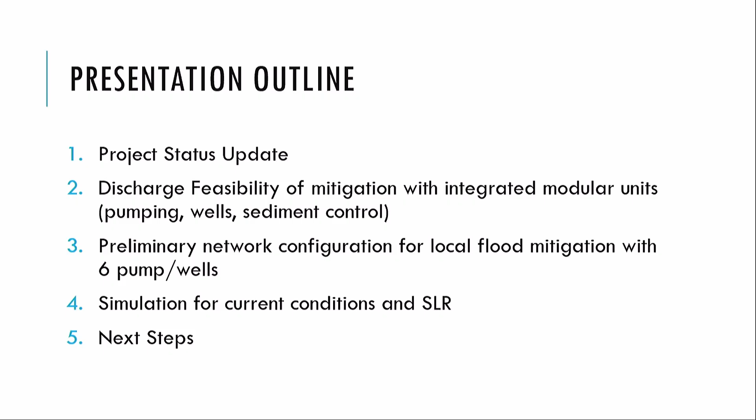I will go through the presentation. In the first 8 to 9 slides, we have the entire concept developed, and after these slides we have more details which we can discuss. In the very beginning, I will provide the information that we have summarized.

After the initial review of the data and after developing the model, we had a hesitation whether we're going to inject fully all the amount in the ground or partially. Our previous presentations referred to partial injection in the ground and partial discharge through the outfalls. After reviewing the data and after the permitting agencies meetings, we're considering a full injection in the ground.

We have determined that we'll need 6 pumps for 6 locations, and because of backup purposes, we're also going to use 6 duplex pumps, which means each location will have 2 pumps - one for backup and one for flow. These can be configured for peak conditions.

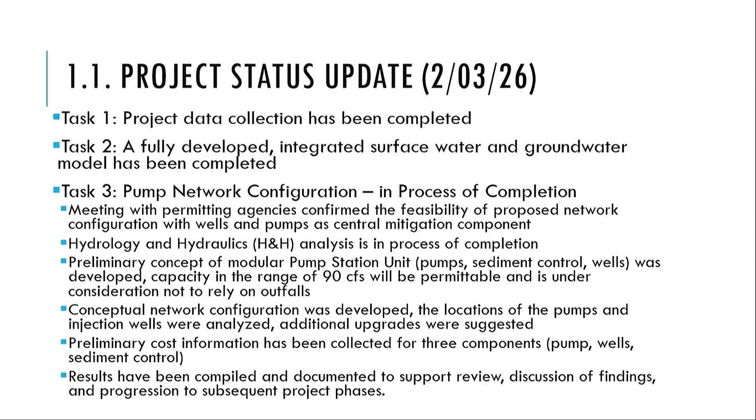Go ahead, so with this I will continue to the next. The project timeline, we're today on February. Excuse me, are you happy with the answer? Yes, well, I'll get back to it. Okay, I'm pretty happy.

It's fine. By the way, we're planning a separate meeting with Fernando, where we'll go deep into the details, because he has expertise in civil engineering, so it will definitely be very helpful.

On February 3rd, we have completed the first three tasks. We're still refining some of the pump network design, we're actually very much completed with it. We're looking in the background through the phasing, and based on the discussion today and any questions we need to provide, we may make some additional adjustments so that this process, together with the entire team, with Mike and with the village team, is a joint effort for all of us.

I wanted also to mention something that's very important conceptually, which will also partially answer your question. Conceptually, if we look at...

I think I have a problem with this, but I had a problem before. I cannot turn it on. Oh, okay, thank you, Mike.

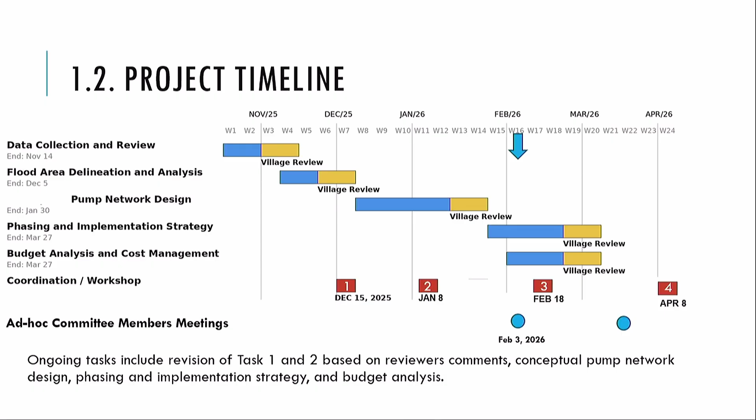So what is the alternative? We're talking about the alternative, and when we talk about it, we had the basis, which was the previous stormwater plan. The previous plan was to drain the excess water and discharge it to the outfalls.

I also wanted to mention the natural hydrologic cycle, because we want to talk about the environmental aspect of our proposal. In the natural hydrologic cycle, you have precipitation, and if there were no urban areas, no imperviousness, this would discharge into the ground and infiltrate. By adding imperviousness, which is typical for urban areas, we are developing excess runoff that has nowhere to go.

And the result is flooding. It's complicated to drain urban areas because when you have everything on top of the surface, you don't have easy access to the outfalls. So that is the base alternative: it takes all the flooded water and discharges it to a pump station. That's not unusual; it's done in many areas.

For our case, what we want to do, and what we are doing, is collect the excess water through the surface network, and this is then injected into the ground. That resembles the natural hydrologic cycle, so we're not disrupting it. We're mimicking the natural hydrological cycle to the maximum extent. This has lots of other aspects.

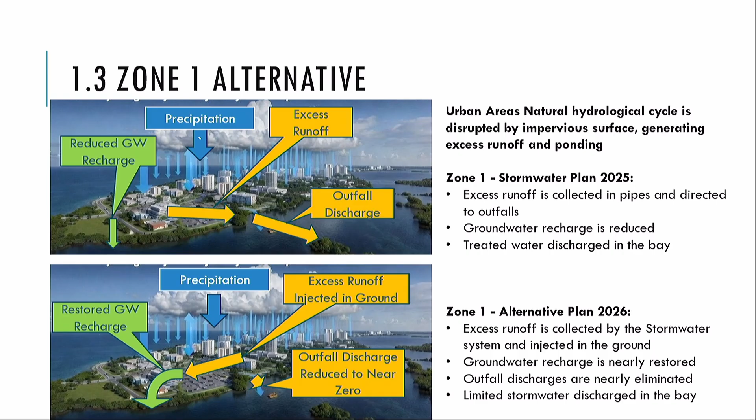So that's conceptually what we are considering. One question we addressed is how do we compare, because we're relying on a model, a numerical representation of this physical system that involves lots of parameters and uncertainties. So it requires calibration. For example, when we have a model, we need to adjust the parameters so it represents the existing event to the maximum extent. Then we say this model is calibrated, and we can use it for forecasting.

That's the same approach that AECOM did, and that's the same approach that we take.

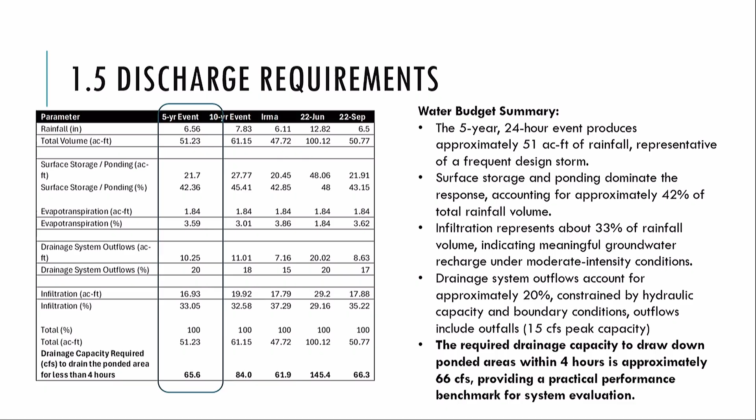Although the pump units themselves are not the most expensive - the most expensive are the additional concrete works, dewatering, excavations, and so on. But these two pumps, the reason we noticed - I'll show you later a figure that shows how the pumping is needed - so in general, we determined that we are relying on 65.6 CFS capacity for the 5-year event. That capacity means the pumps need to work for 4 hours. We need to have pumps working for 4 hours to remove the flooded water, which will comply with the level of service. So that is the objective.

I also wanted to address a question from the previous meeting - Mr. London asked what are the occurrences, or what is the frequency of the rainfall. So we extracted data from 2000 to 2026. We included 2026 too, even though it's just one month, because we had a flood event on the 22nd of January.

So you can see the frequency, and we're not making any statement about trends. You can see that between 2020 and 2024, there was the maximum amount of these events occurred. We're not making any statement that this is increasing with time. I consider this a stochastic process, a natural variability of the rainfall. It can increase, it can decrease, but we need to be prepared for the high point.

So it's definitely very important, and if we do nothing, as Mr. London said, what will happen? We had, for 10 years statistically, approximately 25 events. So we can say that are above 4 inches. What would be the average number of hours for an event?

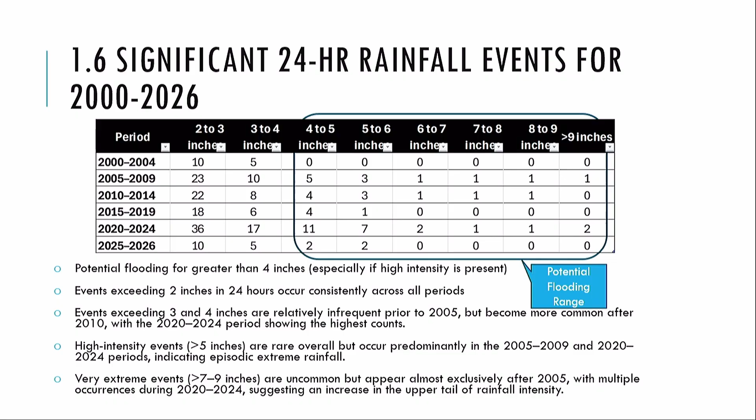But if we say what is between 6 and 7, these are the numbers that occur. Yeah, okay, but I'm not sure you're answering my question. I'm clear on this - are the ones to the right a subset? Because I'm reading 4 to 5, and there's 25 total. So am I to believe that there are only 25 of those events, 4 to 5 and above, and the ones above that are subsets? Or is this aggregate? No, this is not aggregate - this is only valid for this range, the number of events that is between 4 to 5.

In other words, 4 to 5, there were 5 events between 2005 and 2009. 5 to 6 inches, there were 3 events, correct? Yeah, and if we ask the question, what is above 4 inches? Then we'll say 5 plus 3 plus 1 plus 1 plus 1 plus 1, so this will give you 54 events.

Oh yeah, okay, 54, that's the total. I'm trying to... okay, yes, yes, yes, that's what I'm clear on, so they have to be thought of as subsets of it. Okay, yeah, so total 54 events.

If you don't mind going back to the previous slide - and you know I've asked this one before, so you should be ready for this - I want to be clear on how you got to 65.6.

We have 2 other reference points. One is the original 155, I believe it was, and then when we asked AECOM to do the 77, modified based on the change of level of service and design criteria, they came up with 77.

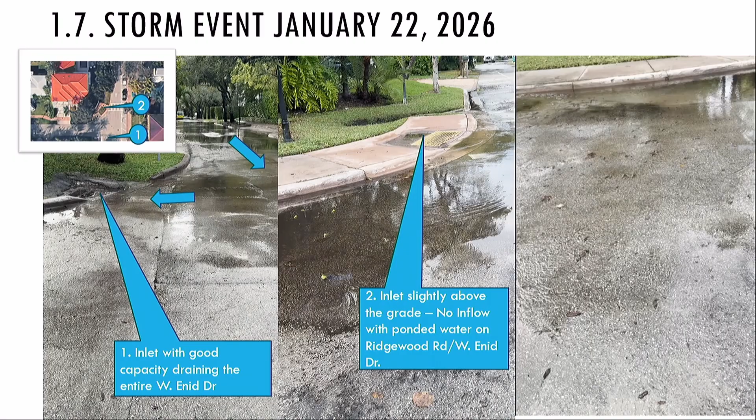And also, if you look at this one, for example, this inlet was above the grade. So if you look, this is ponding that was staying for a long time, so there is no access to the system.

George, I'm glad you went back to that slide. I know you put stars next to certain items. No, go ahead forward though, it's actually on the next slide. Here, you put stars on here for critical tasks, and I was wondering why add or lower catch basins and inlets to flood locations, approximately 120 locations, wouldn't be one of the first things we would tackle. It's the second task on track 3.

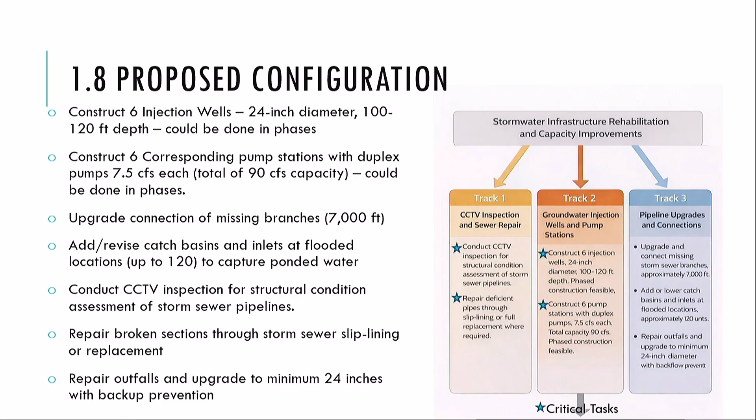Oh, second task, okay. And I know you have it as a task, but you don't have it starred. I would say that would be one of the first things we want to do. I think this will be based on the phasing too. We'll provide guidance on where this could be placed. We have approximate locations, but this needs to be reviewed, and I think this is based on phasing. If you prioritize this as highest priority, we will suggest some prioritization based on our understanding, but ultimately it's your decision.

Again, obviously the model would tell us otherwise if it's true or not, but if you just did that, it sounds like we get the water flowing better with the system we even have right now. Sure, it will improve by better positioning. Yeah.

That will definitely improve. Wouldn't we do that when we were resurfacing the roads in that area? No, this would be more work on the stormwater system. We could slope the roads, but this is more about that. It makes good sense, right? Probably not expensive to do either.

One of the reasons we can't say this would be a priority - I think the priority would be these first two - is because if you add these missing pipes, you're exposing this area to tidal conditions as well.

If you don't construct these wells to reconnect and inject into the ground, when you add these pipes, you're going to expose much more to tidal conditions. So during high tide, this will be difficult to drain - there's no place for the water to go. Even if we get more into the system, it may not do much. Makes sense, so that's the consideration, but we can look into the details.

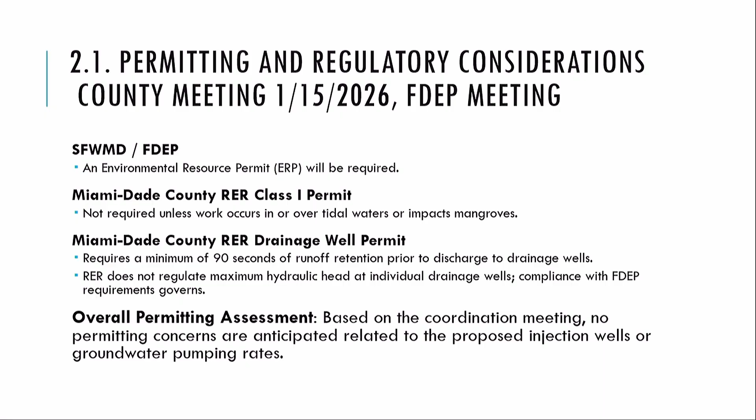So I have a question - how long would it take to get permits? It could vary, 60 days, 90 days on one hand, but on the other hand it really depends. The drainage well permits are typically really quick.

All the permits so we can start construction - well, we don't have a design to know what. Assuming you had the design, how long is it going to take to get permits? We're not holding you to it exactly, approximately - it could be 60 days, 90 days, 120 days. So let's say 120 days, conservative, that's reasonable.

Since you're involved with construction, a system like this - if we said okay, go ahead, we want to do this - how fast could it get done? Assuming the materials were available, the pumps were available, how long would it take to build it? I don't know if I want to commit to a number, just for the permitting.

No, forget the permit. Now we spend 60, 90 days, we got a permit, we break ground, we start, and how long are we talking between start and finish for all 6 modules, how much of the pipe? I don't think he's got a number - it's not going to mean anything. I mean, like 5 years, 10 years, 20 years? No, I mean 6 months, 1 year? What are you talking about? I would say it depends on the contractor. Typically these projects are within 1 year.

One year, okay, or that's from the bidding. If you were to build, one pump and one... let's not get too far - within a 2-year window between pump, but with permits and all the rest of the stuff, 2 years. If we said put the foot on the gas, we could probably get the project done in a 2-year window. Is that what you're saying? Is that a reasonable number? Yeah, 2 years would be great, reasonable.

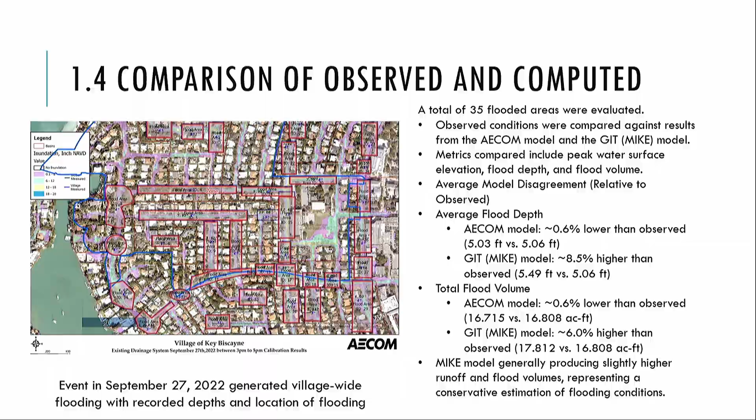On one of these pages I saw where we said observed conditions were compared against results from the AECOM model. Exactly what observations, and where did you get them? Going back to this image, the village, in September 2022, went and delineated the flooding that occurred on September 27, 2022, along with the depth. Okay, so that's my point - in 2022, none of our system was maintained, and it hadn't been maintained for 15 years.

So that observation is not really valid for you or for AECOM, because AECOM, I think, did the same thing. I think we need to observe now, where our Public Works Department has really jumped on it and is doing a really good job of keeping the system maintained, and seeing where the actual flooding actually is, right? No, absolutely agree. I think that's what we mentioned earlier, that we want to have understanding so we can do refinement of our analysis, because that's one of the points I was showing in this previous image - there is a location that really has good flow.

Yeah, so the other thing that I want to point out is that when we get involved with just talking about engineering and removing water and stuff like that, and how it's easy, and then we talk outfalls - I think it should be the goal of the Village of Key Biscayne, as a barrier island, to be a good steward of our Biscayne Bay, and eventually, one by one, eliminate every single one of those outfalls, and not send any water out into the Biscayne Bay, and send it all underground.

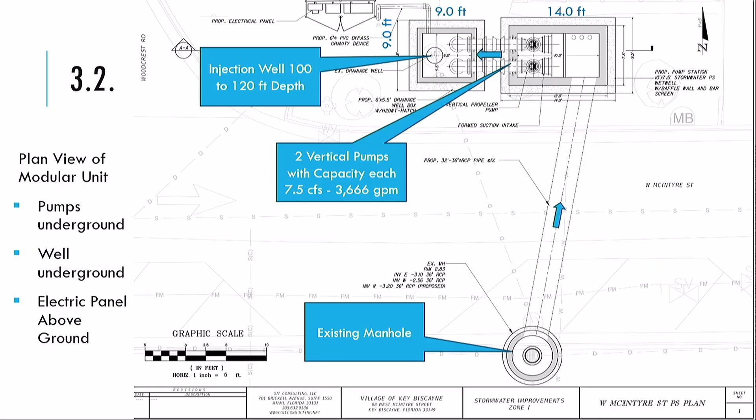We're considering we can convert it, but it's not necessary because basically we need to create a new well with casing, and it's appropriate. This is an example of how it would look underground, which probably won't be visible for anybody to notice - it will just look like a manhole.

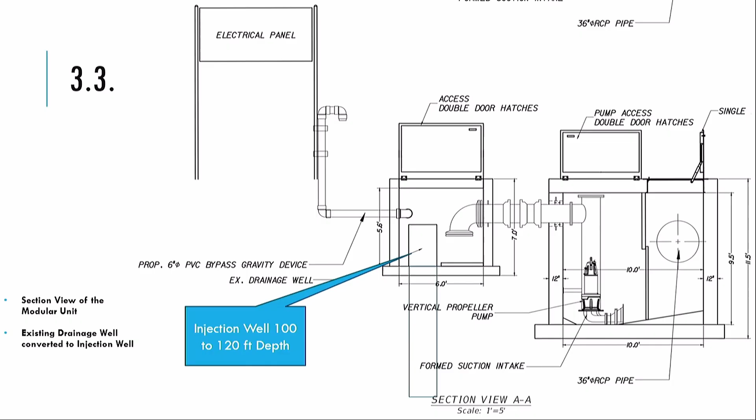So depth-wise, what are we looking at total depth? 100 to 120 feet - no wait, that's not the well, that's the hardware. So does it look like it's 12? 11 feet 5, max, so call it 12 feet. So in volume, we're 9 by 9 by 12, and 9 by 14 by 12 - slightly different.

We could put this in the road, in the right of way, right? Yeah, we could put these in the streets. We don't have to put these in people's yards, we looked at the right of way and identified some locations - we need to go over those with the team to see if they're feasible, check for utility conflicts.

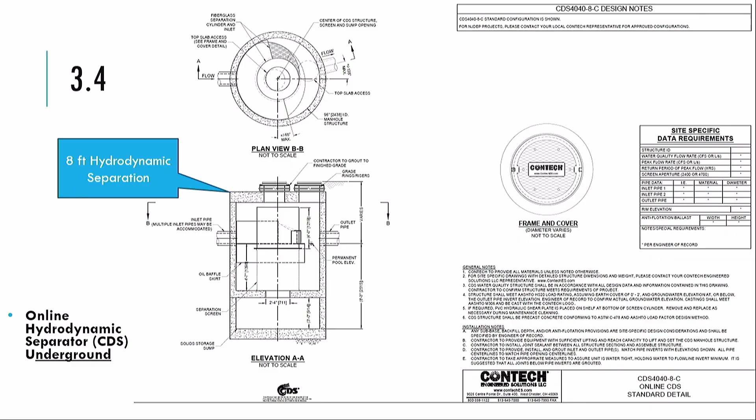We also wanted to mention that the pumped flow changes the flow direction of the pipes. Without the pumping, naturally the flow direction can go in different directions based on where the pooled water is, or the gradient. In this case, the flow directions in the lines will be towards the wells, because that will be the lowest point. This also means that the original outline of what is Zone 1 will not be Zone 1 anymore - it will be different.

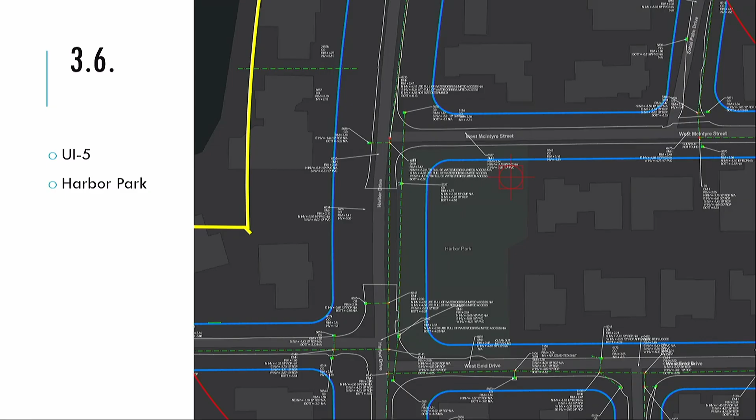Okay, so here are the pumping rates, based on the model, based on the flooding, and based on activation of the pump, allowing only up to 15 CFS.

Pump 6 in plan, is that the one on Harbor Drive? Pump 5 is the Harbor Drive one. Okay, so Pump 1 is the school? No, Pump 1 is 6, the school. Where's Pump 6? Pump 6 is in the middle, right there, it's the squiggly one. I'm just wondering where it is in plan.

It's the one that's freaking out — yeah, this is the one that experienced some competition with McIntyre. That's the one basically near Joe's house. No, that's not it. The mayor's is the problem — he doesn't have one. He has one, no, he will have one. UI 2 is the one near the mayor's house. So you put it right on his lawn. This one, 6, is in the middle, and I guess he's this one. So we might as well put him on his lawn, yeah.

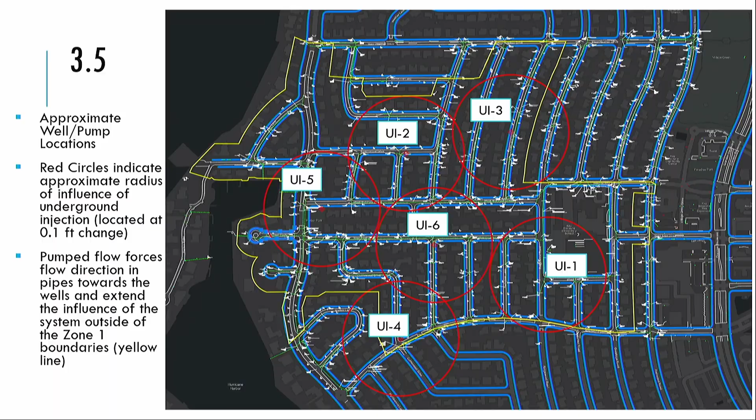But in any case, what's important to notice here is that these pumps will work not more than 2 hours for peak conditions, and they can be switched, maybe for 1 hour to work both of them, and for the rest of the time just one.

So Giorgio, I'm not sure I follow this slide. I understand the ones that are not erratic, but why is this one, number 6, so erratic? Is that because there's so much water there and we have laminar flow?

No. So this one — the pump has a wet well where water collects and accumulates, and we have a control there. If it's below 6, stop the pump until it's full, and then if it goes above -2, start the pump, and it very quickly... this indicates the flow comes slowly from different sources, and it's not steady.

So this pump is turning on and off, on and off. Yes, and that depends on how these are operated. But I think we will provide additional detail — this is just an example of how the flow in the pumps looks.

So, quick question for you — just narrow in on number 1, top left. I'm seeing it operating, I'll just start at 5 and go into 20. I'm seeing it operating for 10 hours. Are you saying that it only kicks on at a certain point? Well, yeah, this operates continuously because there is continuous inflow, and we're keeping this at -2.

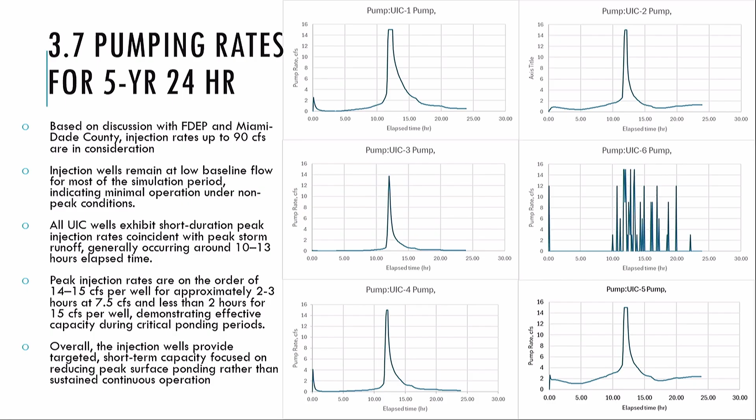That's why that time is really short, because it's only 2 minutes. It looks like it's only 2 hours because of proximity - if you look at that, the thing's basically only running for 2 hours. So that's when it's running, and the rest of the time it's just dissipating the water when it's not running.

That's not significant. Explain that, because it still has to run - it just can't not run. The water's got to go somewhere, so it goes in the wet well till it fills up.

This one shows that's a lot of water. But I'm looking at pump 4 and pump 3 - I'm just narrowing in on one so that we can get a singular focus.

Pump 1 is looking like it's using more, running more. But basically pump 4 and pump 3 are used very rarely - not rarely, but for a very short period of time. Pump 6 doesn't turn on at all until 10 hours, and then it runs on and off.

So the other concept is that this is a 24-hour rainfall. The peak is at this particular time where it's exactly the flooding, but there is rainfall that starts very slowly, goes up, and then recedes quickly.

How many inches in that 24-hour period? This is 6.56. This is the 5-year event.

We will also provide, since we mentioned we'll do sensitivity analysis, in the report the 10-year event, the 25-year event, and the 100-year event. I think the 100-year event is very important for various grants and applications.

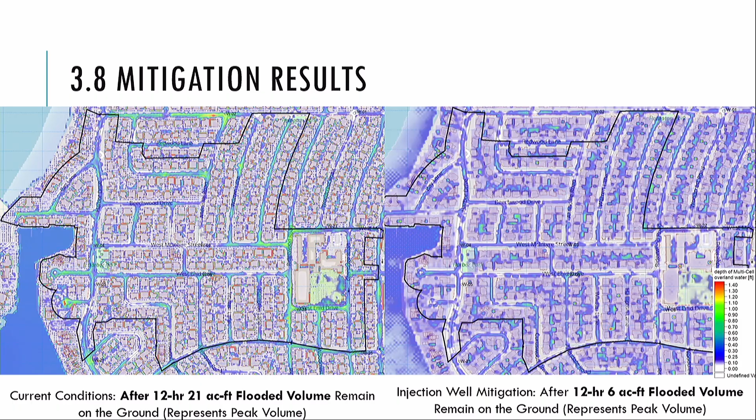That's why I brought that up before. Yeah, it's got to go somewhere.

We again want to emphasize the importance of having green infrastructure on a parcel level - reduce any impervious areas, driveways should be gravel - it should allow somehow this to reduce the overall, so that's like management on a parcel level.

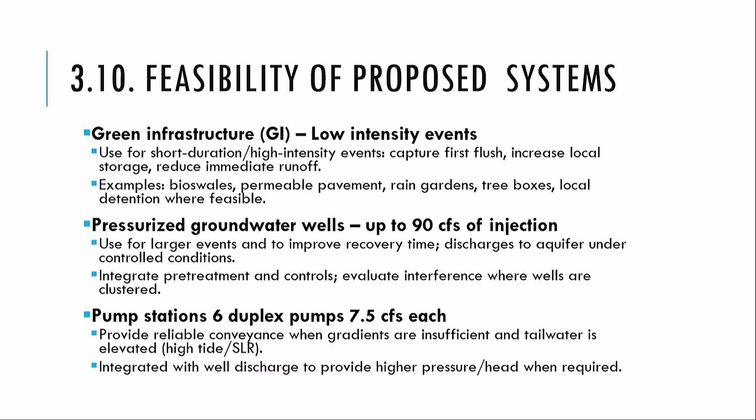And again, the feasibility - we believe we have a feasible system. Now going back to the boundaries, what are the tidal boundaries? Because we did analysis for that as well.

By the way, the previous analysis that we're running is for the 2050 intermediate, and we will be providing this information for intermediate low and intermediate high. The NOAA intermediate, based on the data from NOAA, increases the water level by 1.069 feet in 2050.

It's important how we are calculating the 2025 figures. We're counting 1.069 from 2025, for the next 25 years. They specify how we compute 2025 by using the October average, which gives you a representation of king tides.

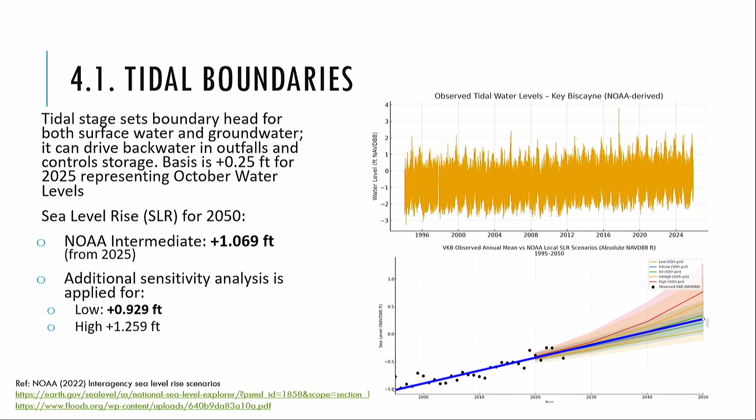Giorgio, before you go further, back to new lines, looking at 3.9. Are the lines going to be in the center of the street like they are today? The new connecting lines you're going to put in, how would that affect us doing underground electric? Could we move forward with underground electric at the same time without worrying about too much conflict with you jacking, boring underground in the middle of the street for the pipes?

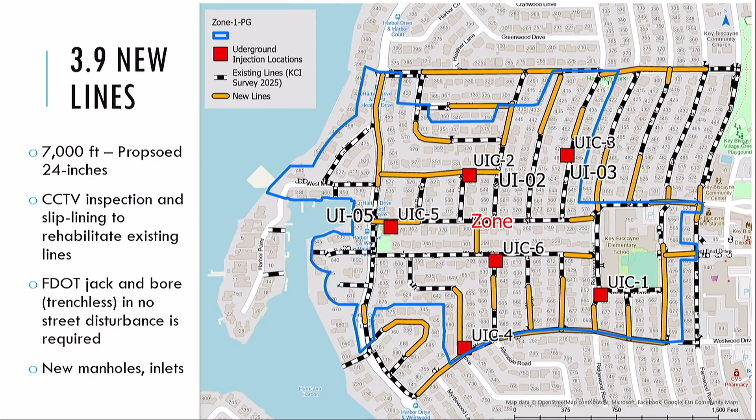Or do we have conflict? Yeah, we'll be able to look at it. In our plan, Mike provided underground utilities, we have them planned out, so we know where things are located. We have a set of plans, and we'll look at each street individually.

Normally the electric will be above the storm sewer lines, so it will be shallow, and these will be a little bit deeper. So we'll have to coordinate. Thank you very much.

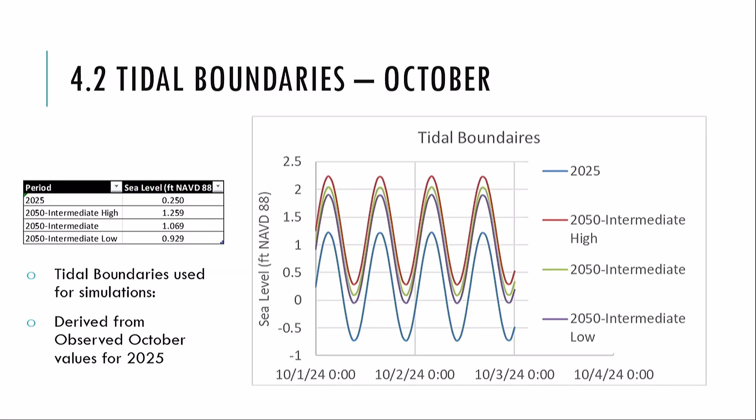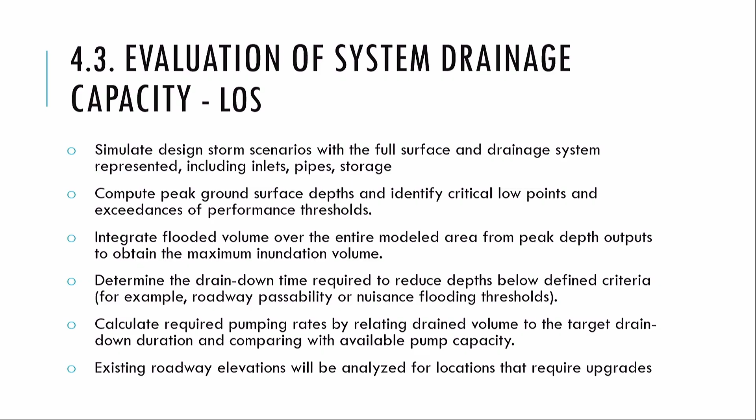These are the tidal conditions we are currently using for analysis, derived from the observed October tidal conditions. Here is the outline of exactly what we're simulating and how we simulate the design events. We look at the peak volumes. We discussed this in the past, so I'll skip this slide.

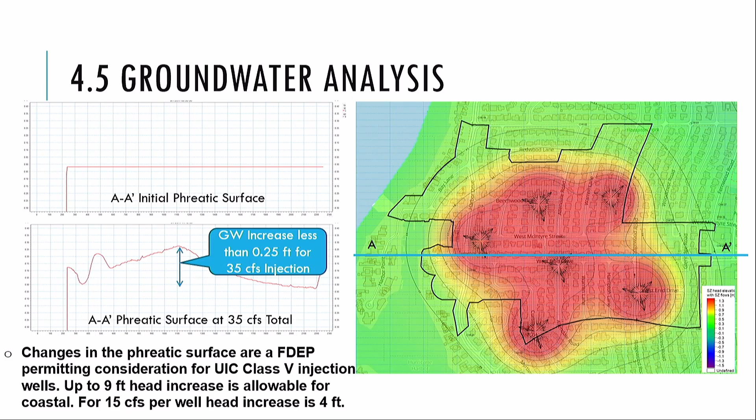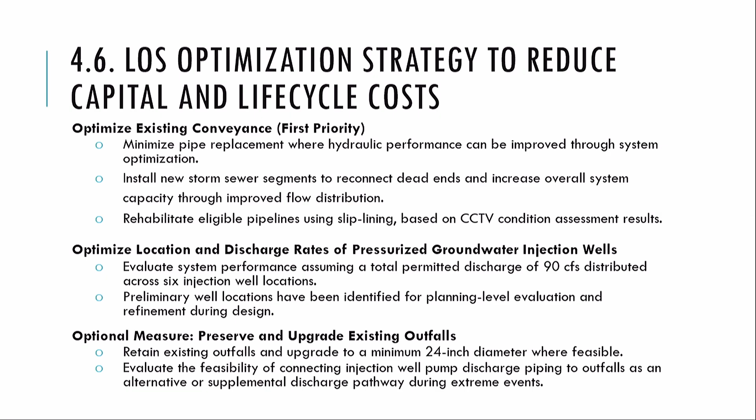This is the optional piece - preserve and upgrade existing outfalls, which we discussed. Here is the currently preliminary modular cost. We looked at that, but we're not completed with this because we had changes to the concept. We were at 35 CFS and had a different amount we inject.

For the current concept, which we think we're close to final on, based on contractor discussions and other cost estimating professionals, we believe the injection well will cost around 200,000, most likely lower, but that's the budget price. The pump station we priced with additional dewatering controls at 3.5, which is very different from what we originally came up with a month ago, when we had a slide showing 800,000. This will require more detailed recalculation.

Most likely we believe the price may go down, but there is some uncertainty. We were committed to provide level 5 accuracy, which is plus or minus 50%. But we'd like to be as accurate as possible, so we'll spend significant time in the next period trying to provide the best cost for the pump station, since this is the major component. The sediment control structures are more or less standard.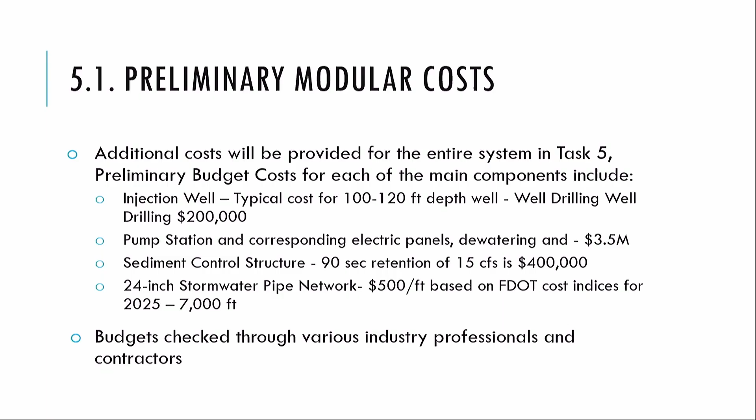I want to make sure everyone understood what he just said. He says, do you want to give me a target price and I'll build to it? Or do we want him to develop a requirements-based system and he'll cost it out? I didn't hear him say that. What I heard him say was, do you want to do it all at once, or do some now and not all together?

He's giving us a price here of $30 million for the proposed system for this whole zone, if you want to call it Zone 1 modified. The question is, do we want to do it all at one time or phase it? I think that's what you're saying. Yeah, more so than anything else. That's what I understand, Steve, but maybe we understand it wrong.

I also think there's a conversation about working with Giorgio to develop this. I want to understand it, but what we hear today is, you're telling me that based on the level of service we've asked you to do, and what you found out, 30 million is a reasonable number. It's not going to be 60 million. It's not going to be like AECOM.

Yeah, because you already provided some guidance, you don't like the 320, so what we're asking is, can we also discuss that? What is approximate—maybe we can propose, maybe we can improve and refine the design in a way that more or less satisfies some priority aspects. But going back to the main thing: right now the scope is, is 30 million a reasonable number? Obviously we don't have final numbers, but based on your experience, and Alberto dealing with contractors, etc., is this a reasonable number, or is it a bait and switch number?

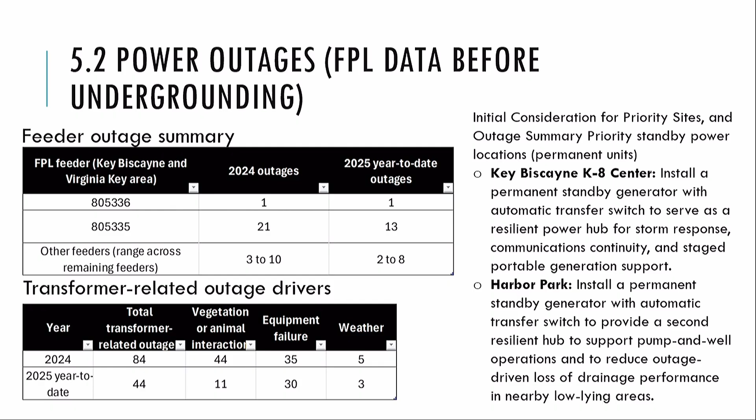Other than that, we discussed the potential locations, and also the possibility of electric battery power, a different type of power, not diesel generator, because those have lots of issues. Either a mobile unit or electric power with battery, or solar power. So we could possibly recommend 2 locations for that.

These are the hotspot areas - obviously the school, Harbor Park is one. We picked Harbor Park because that pump station is going to drive a lot of the water on Harbor Drive, where we have a major flooding problem - that's number one. Second, it's the key location next to the outfalls, and there is sufficient space to add equipment. If you don't have space, it becomes challenging and you may need to rely on mobile units.

Before you come back for the next meeting, could you calculate the probability based on the previous 10 years of when you had the above level of service - whatever that is, 14 inches, 3 hours, etc. - and underground feeders, not aerial, since we're going to have underground. What's the probability of both occurring at the same time? Come back with a number so we have some idea what we're really talking about. Historically that will be a very low probability, but still possible. That'll be a probability - multiply them together, each occurrence.

Eddie just said they were going to do that - they're going to go to previous other clients where they have underground power. Okay, fine, I'll need to turn my hearing aids a little louder, because this is a new condition right now. If you have underground, you cannot rely on historical data.